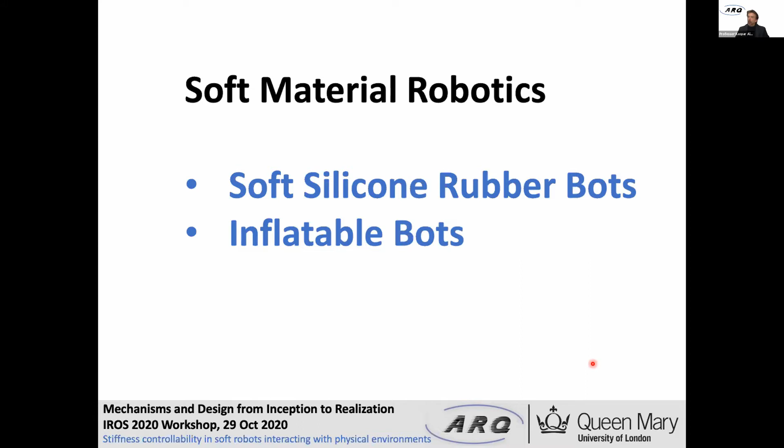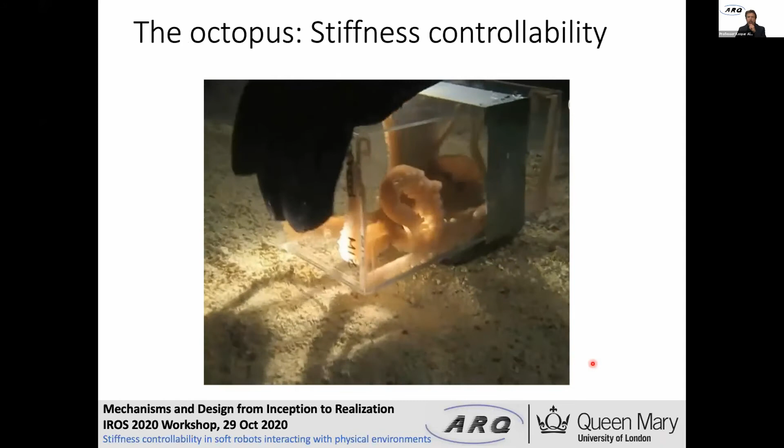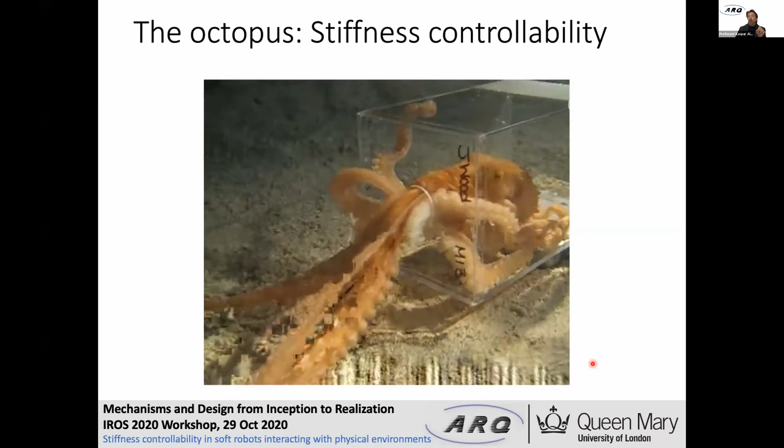In the spirit of this workshop, I don't want to go into too many details. I'm interested in soft material robotics, and I will focus on two parts of the work we're doing: soft silicone rubber bots, as I call them, and inflatable bots. We take inspiration from the Octopus, a fantastic animal with no bones in there. As you can see, very flexible, very compliant, very squeezable, capable of going through very narrow openings, but at the same time also able to apply forces to the environment by stiffening the muscles in their bodies and tentacles.

Looking first at those soft silicone rubber bots that we are working on, I have to go back a bit in time. The work started in the framework of an EU project, and the idea was to create these soft and stiffness controllable systems for minimally invasive surgery. And so from that, the work started.

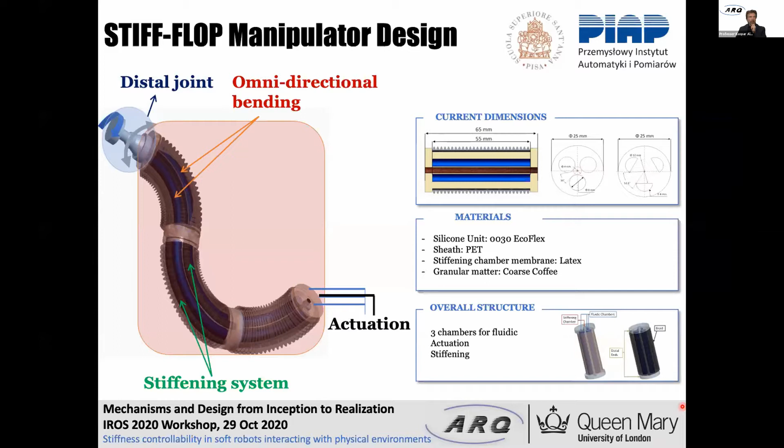It was nice also to see the work by Professor Suzumori, who gave us a lot of inspiration. We created devices very similar to what he has also been working on for many years. We started with systems that looked more like that, and we were not so happy because there was a lot of ballooning happening.

Here we had just silicone tubes, and that had chambers inside, and we filled them with air, so they were bending nicely, but that was not really what we wanted.

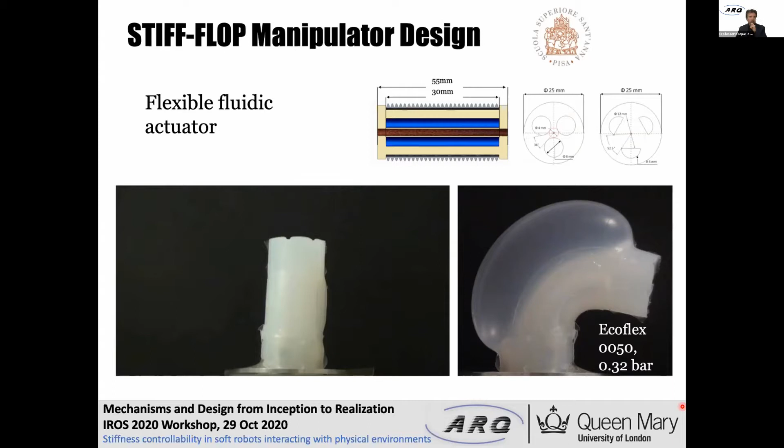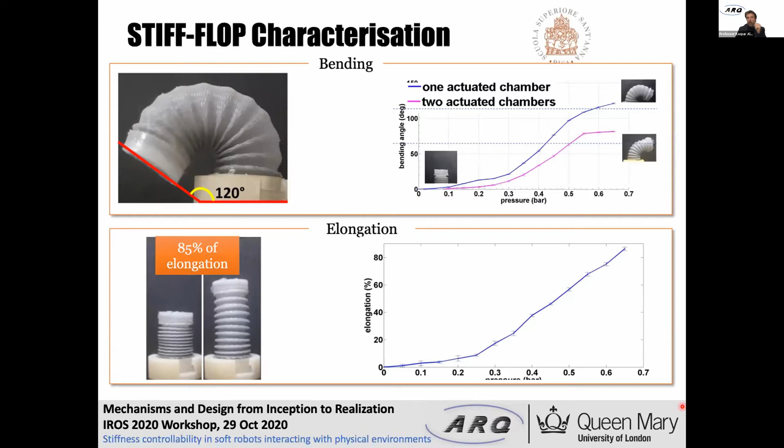So our first approach there to overcome the problem of ballooning was to actually put a mesh on the outside, as we can see here, and that kept everything at bay. And so we could bend our devices, we could elongate, we could apply forces to the outside. And as you all know, these devices are fairly robust towards kind of forces from the outside. So that worked quite well.

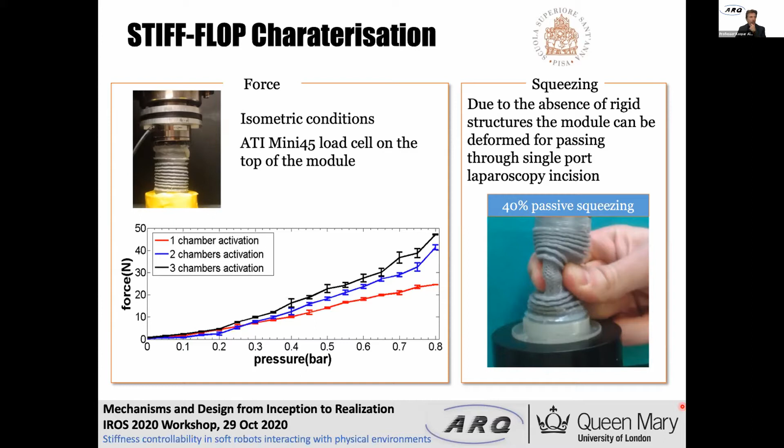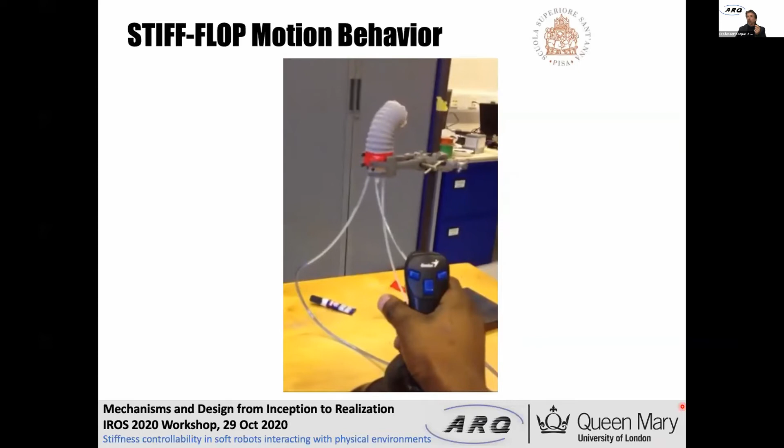We had our first prototypes, and I show here one example of one of our segments. So three air chambers inside, and then we are using a joystick to operate that.

But that was not really what we wanted. And even though we could avoid the overall ballooning, the ballooning was kind of happening inside. And when you have multiple chambers or multiple actuators inside one of these robot segments, then they influence each other. So that was really not good for the performance of these systems.

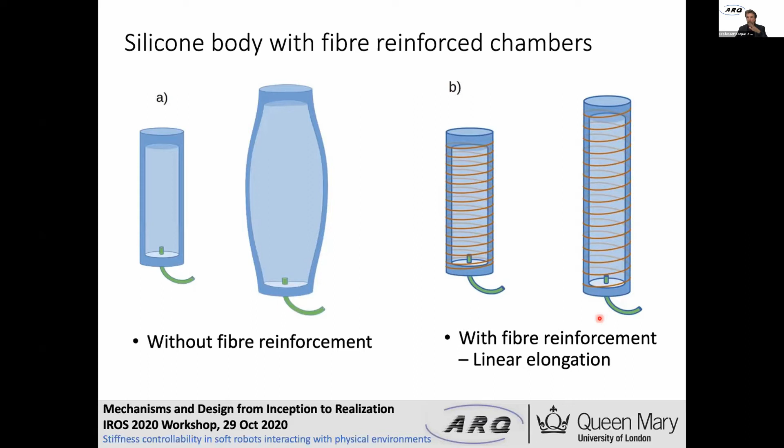So we decided then to look into fiber reinforcement and to apply that, a fiber on the outside of these chambers. And that really improved things quite a lot. As you can see here, this is the non-actuated state on the left-hand side. On the right-hand side, we push air inside and we get really a nice linear elongation.

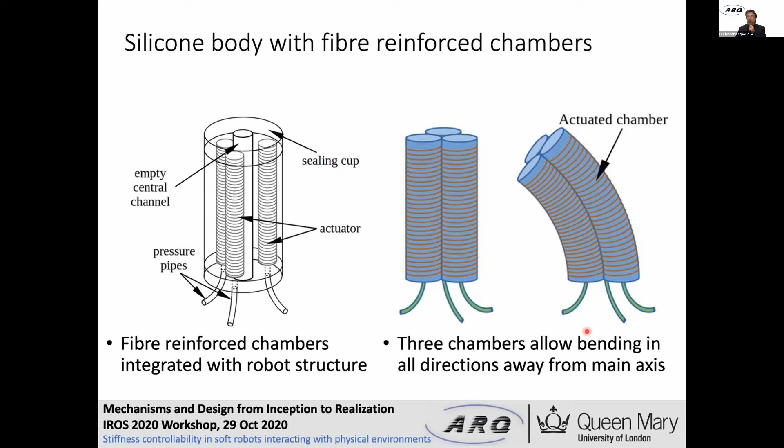And then we can put multiple of those actuators together. As you can see here, for example, on the right-hand side, you see now three of them together, bundled in a silicone rubber form. And when you actuate now one chamber, then you achieve that kind of bending. And that led to further development.

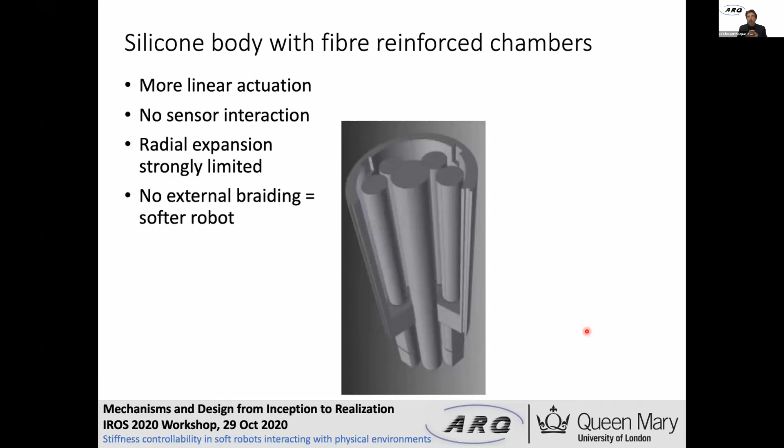So you can see here the CAD drawings for the molds we created. I should also highlight that we were really using molds here. It's quite a while ago, and 3D printing was of course available, but 3D printing flexible materials, soft materials, was not really an option then. And so we created these molds that were then filled with silicone material that could cure in those molds and be turned into these kind of structures.

So you see here in gray the silicone material. We have a central area, a hollow space to feed all kinds of things through. And these are now these fiber reinforced chambers. As we can see in this case, we work with pairs of chambers, and so we have three pairs all around. These chambers can be now actuated, and when they are pressurized, then they start elongating. And because everything is kept together in this soft structure, we achieve bending in one direction.

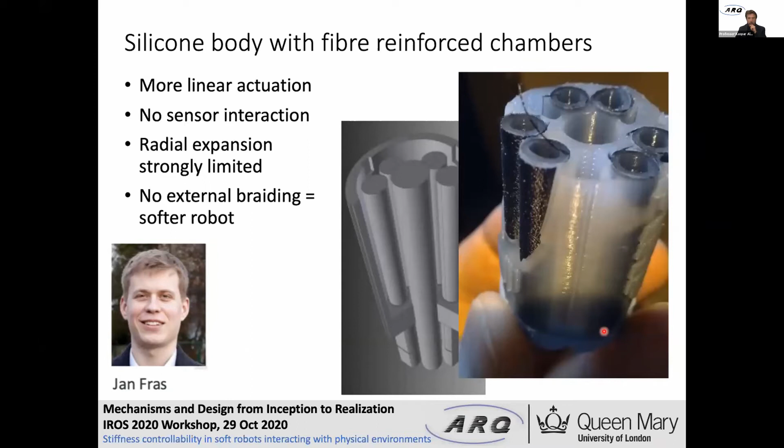I have to mention in this context my PhD student Jan Fras, who has been really involved quite a lot, and I will mention him quite a few more times in the coming presentations. Now, what you might say is, okay, that is nothing new really.

Others have used fiber reinforcement for their pneumatic chambers. So the point I want to really highlight is the fabrication process we are using. We roll up, wind up the fiber before we start any messy work with silicone material. Many others first create a silicone structure and then apply the fiber to that, which makes things more complicated because it's more difficult to apply the fiber.

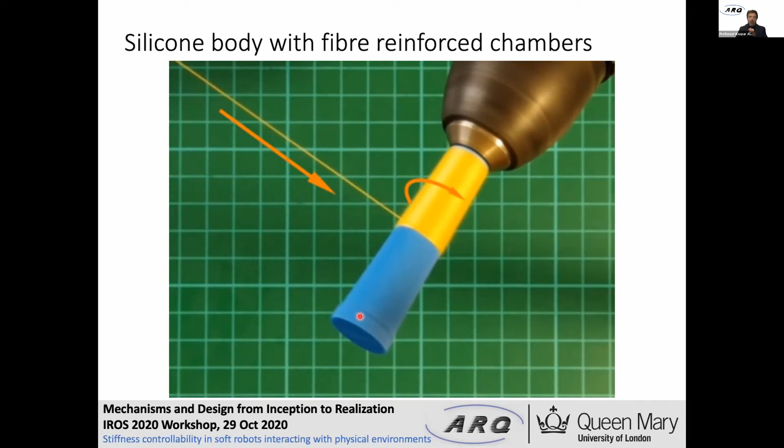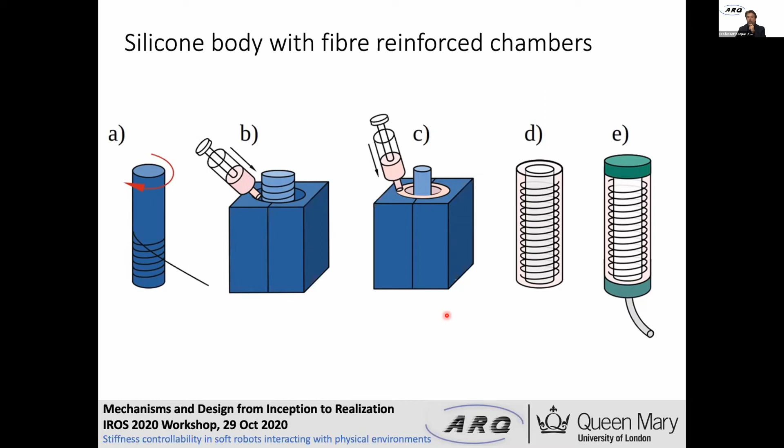That is then stuck inside this first mold, which is filled with silicone. After it is cured, it's taken out, the mold is removed, and you create an empty space in the center that you fill with silicone. So you apply the silicone from the outside, then once the fiber is in place, you apply silicone from the outside and then from the inside. That makes the process much more rapid and accurate, because now we have a very well applied helical fiber structure sitting in the wall of our inflatable chamber.

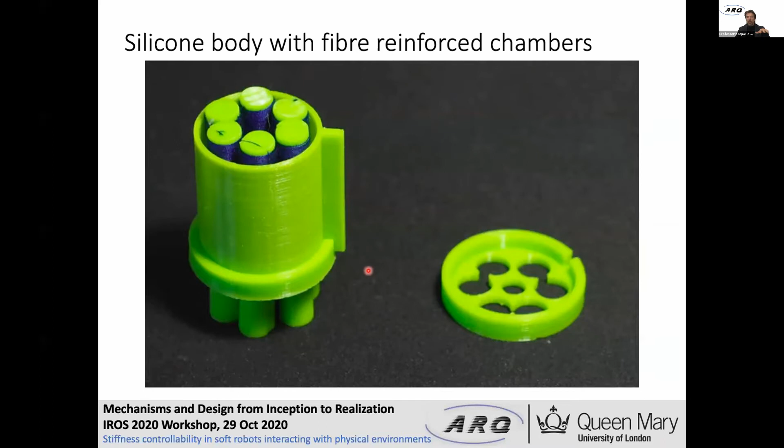And Jan Fras, I have to mention again. Here you can see how these things are put together. We have the outer mold, and inside we have the multiple actuator chambers with their fibers on them, and that is filled with silicone material, with a lid put on top.

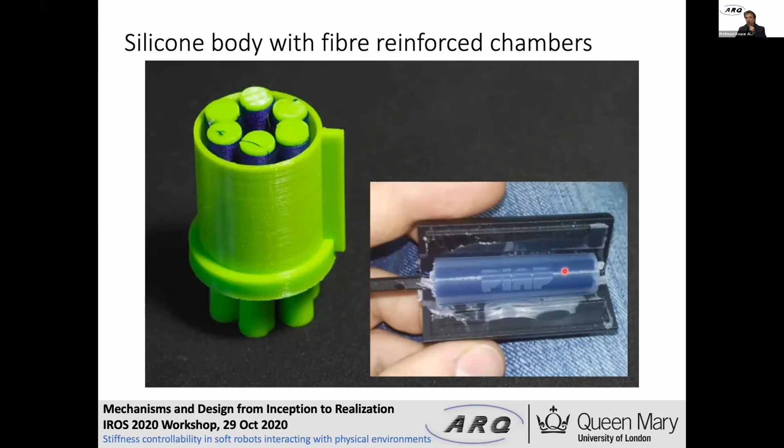Here's another view where we can see how the silicone is formed around the inside chambers. You see here in a slightly darker blue these chambers sitting inside our structure. That allows us to make nice robots like these.

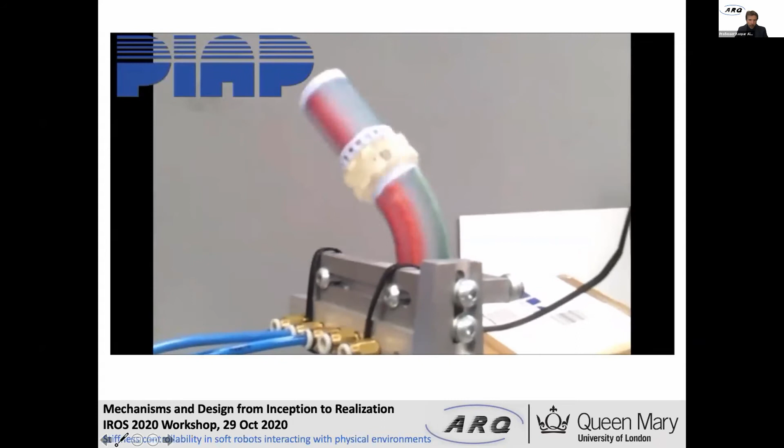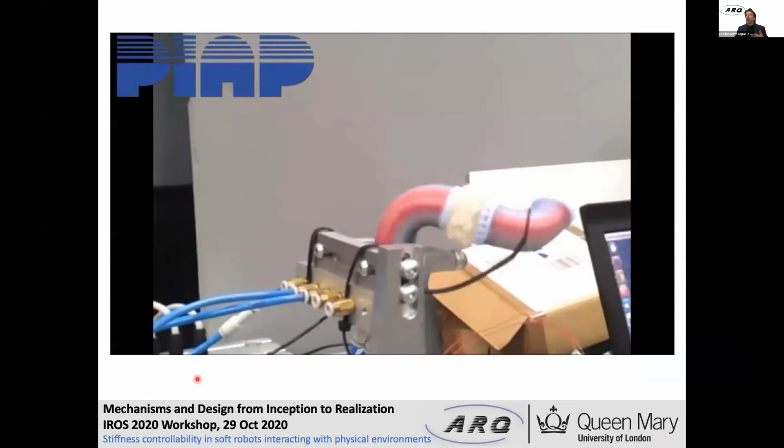Can you hear the sound from the video? You can hear it. I don't want to, I mean, it's not there for you to hear it, but never mind. It shows that we use, of course, a compressor, a problem that was highlighted beforehand.

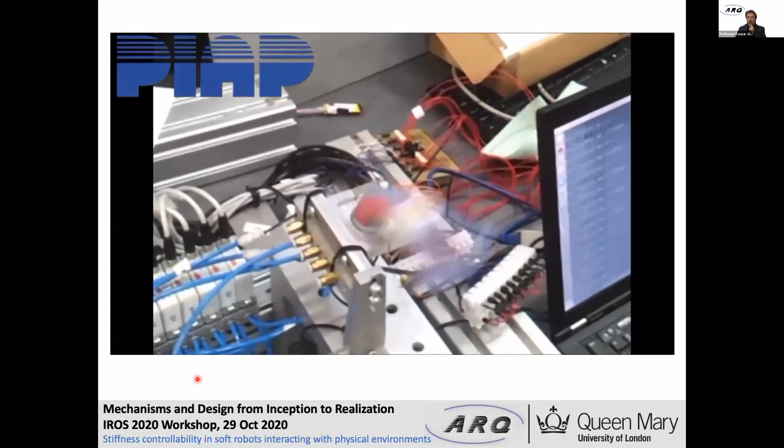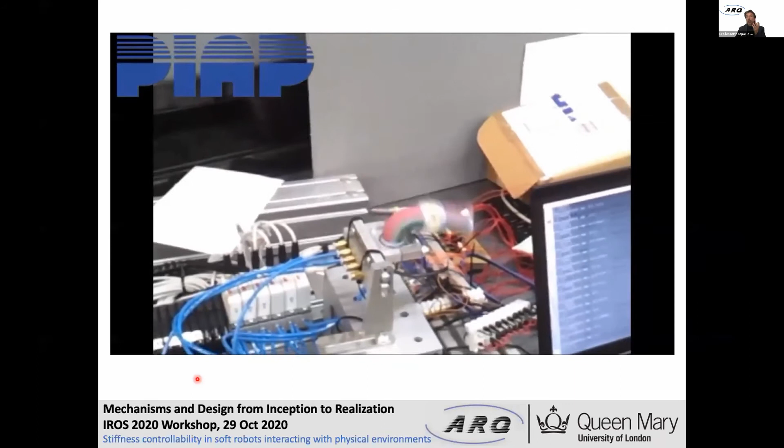You see the blue chambers there, blue tubes that feed the air into these robotic devices, which actually work quite well, as we can see here, very robust, very nicely controllable. We are using a PlayStation controller to control them.

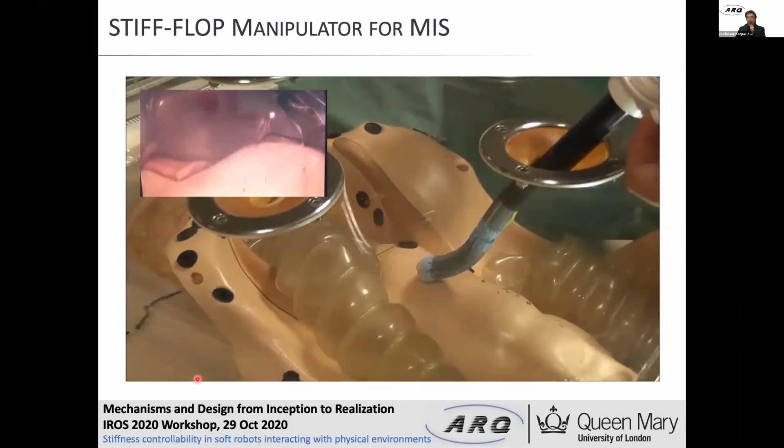That can be further developed towards the creation of robotic devices that can be used for keyhole surgery. Here we are inserting one of our robots, made up of two of those segments, inside a replica of a human body, so it's a phantom. It has a camera at the tip that gives the images we can see on the top left. We can now move inside and use the actuation and dexterity to move forward and move around obstacles that are possibly in the way.

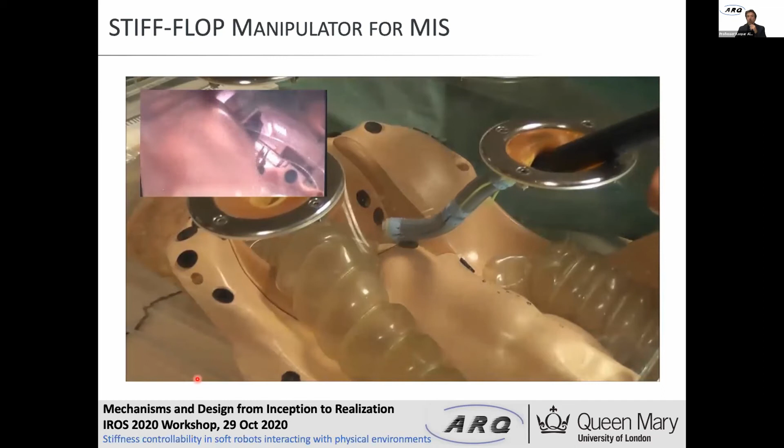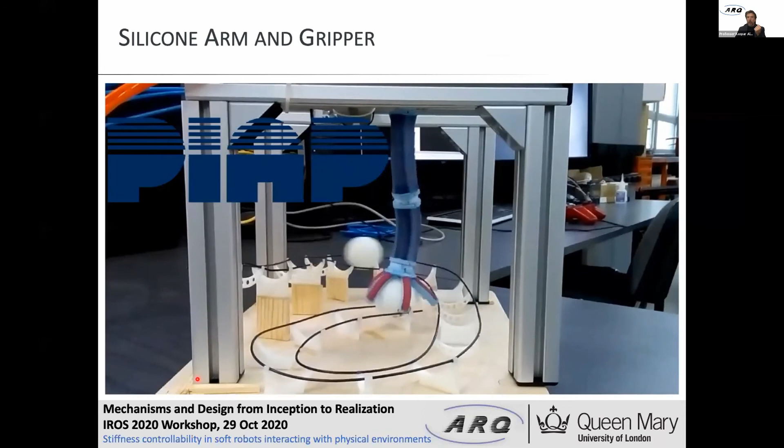The same principle has been applied here as well. You can see the same kind of approach taken to create a robot arm that could possibly be used in manufacturing. We have 2 segments in the main body, the top segment and the lower segment, each with 3 pairs of chambers that can be actuated to achieve that movement.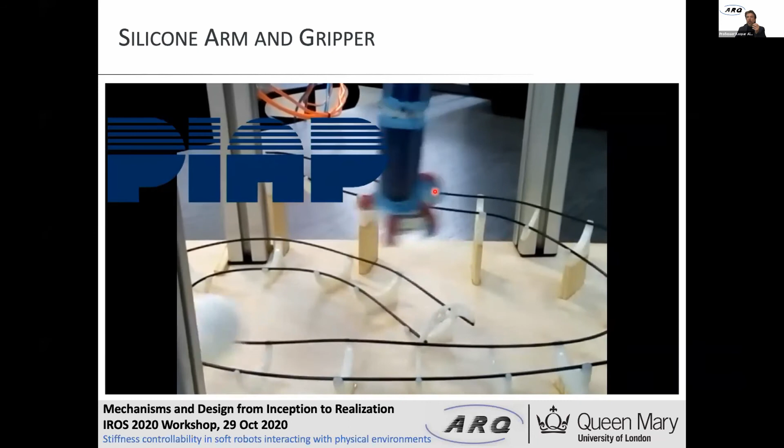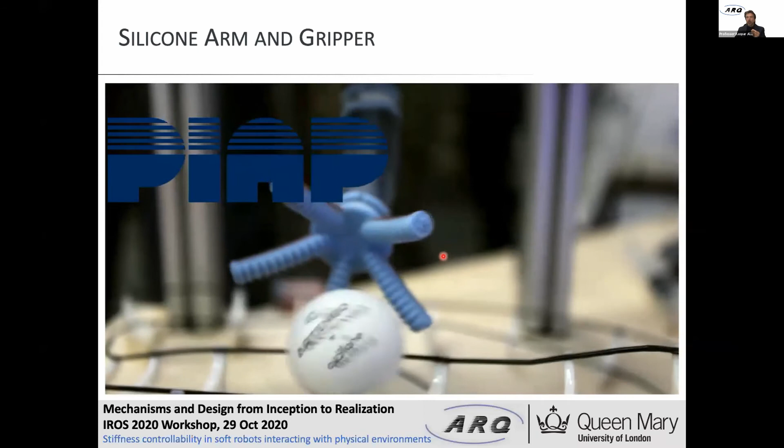The same principle is applied again in the robotic fingers. Again, we have these chambers built in. These are fiber reinforced and allow us to carry out very robustly these kind of grasping movements.

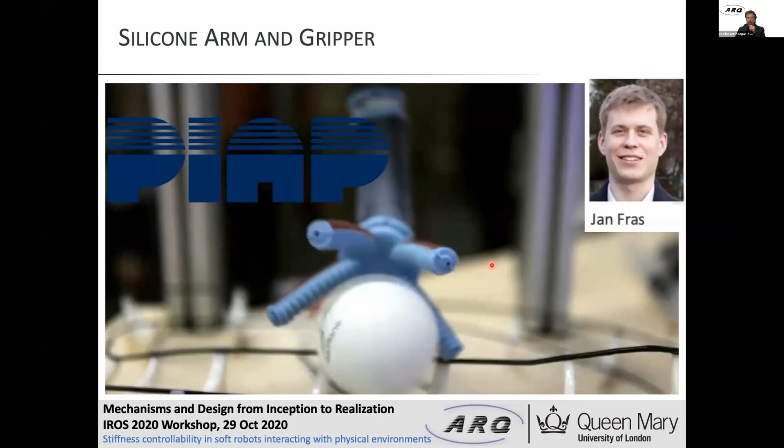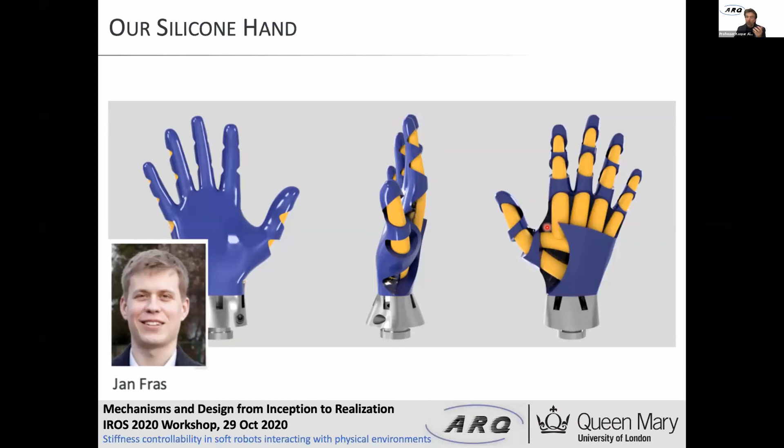I mentioned Jan Fras a few times - he is also in charge of these hands that we have developed. Again, the same approach is taken. We have in blue a stiffer silicone material, integrated with these chambers. In yellow, again the same kind of chambers, with fiber reinforcement, this time to make them elongate in a linear fashion.

We can see that here in action. So we have our robot hand here, and it is now controlled by a leap motion input device, and gives quite natural movement, I think.

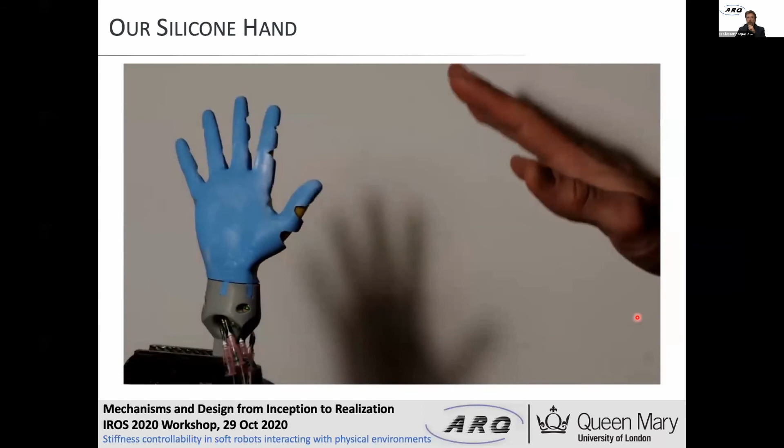A few more examples. Here we have moved forward and created a kind of tentacle, based on the same principle again. The only difference is we have split the chamber into two parts.

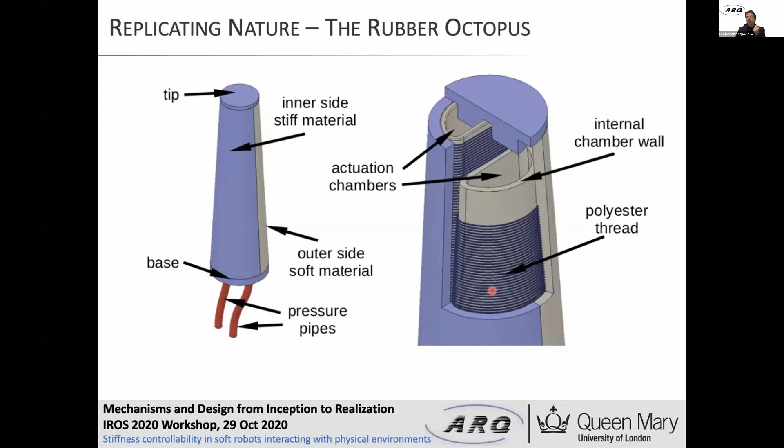So you have one part here and another part there, and you can see again the fiber reinforcement. This allows us to create dual chambers combined together, giving us much more control over the arm it's attached to, which we can see here in action.

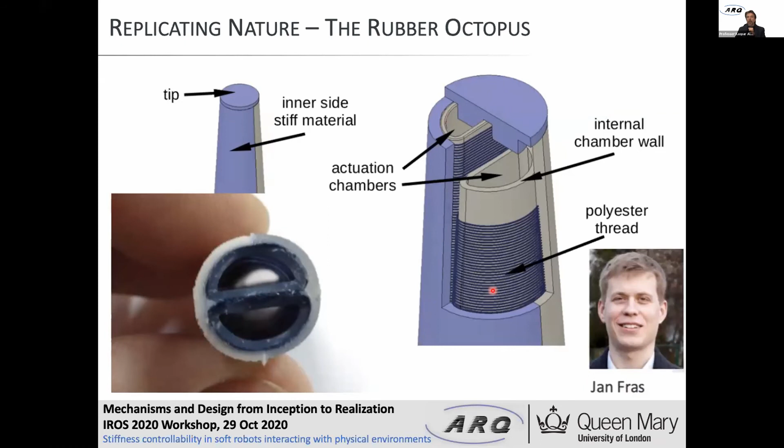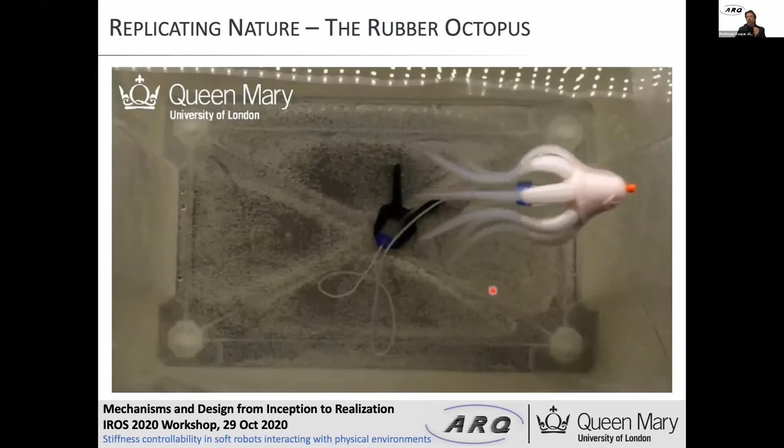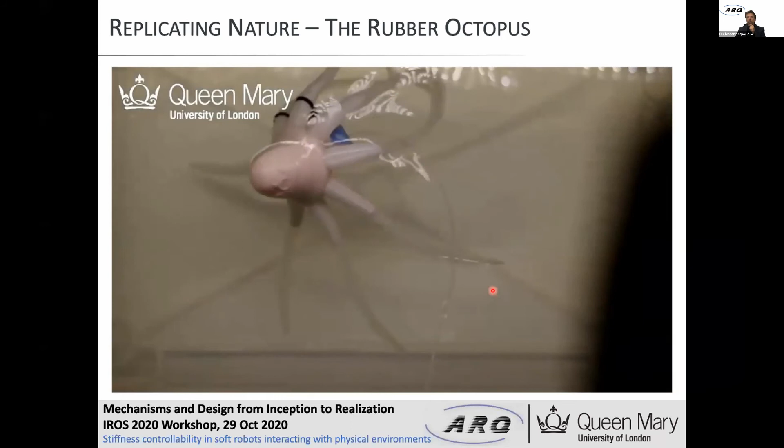We can achieve different movements depending on how we control the air going into these chambers, and also control the way we actuate the various chambers, 8 of them in this octopus phantom. We can also control the stiffness in these chambers.

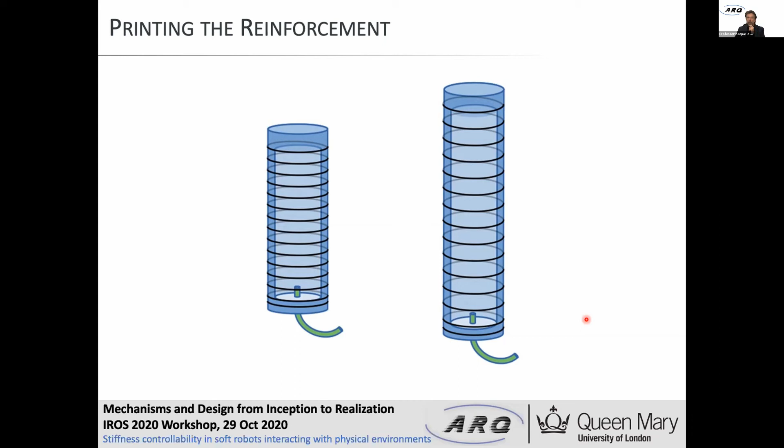Coming back to this diagram, we're trying something new now. Instead of winding the fiber onto a rod, we are trying to print the reinforcement, so it becomes part of the production process to make production even simpler. Jan Fras has also worked on that. I have to accelerate a bit, I feel.

We can see here plastic fibers being printed, for example from PLA or from nylon. Nylon gives better results because it is more flexible. And these actually remain in there.

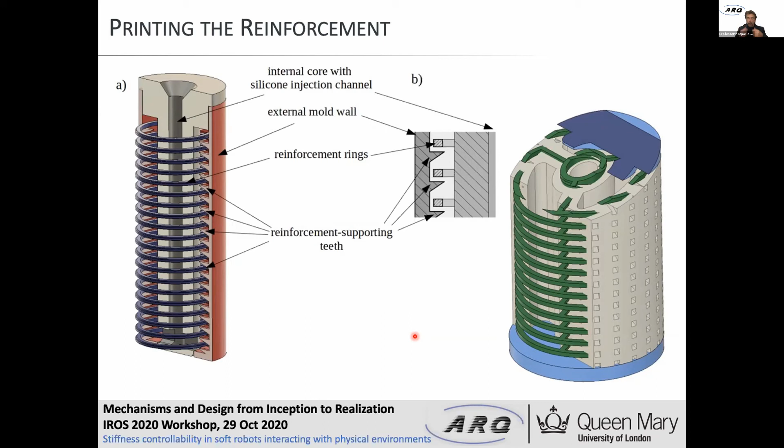The trick here is to have a scaffolding on the outside. You can see it with those hooks sticking out, holding the rings in place during the production process. The structure is printed, silicone is poured in, and then you destroy the outer scaffolding, and what remains is...

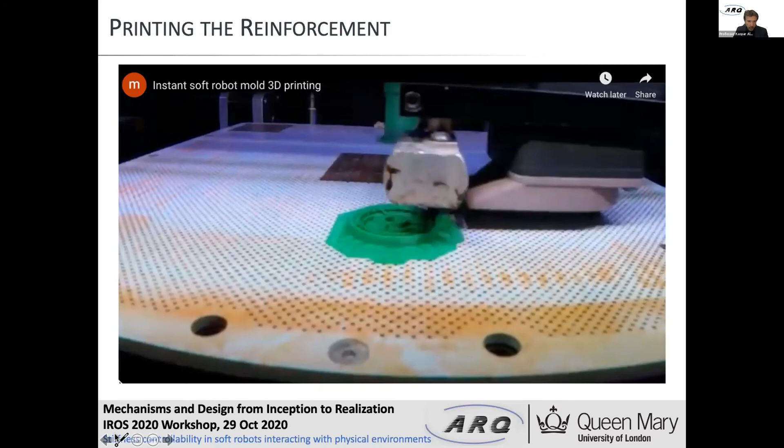The video doesn't run, just give me a second. Now I should be able to run it.

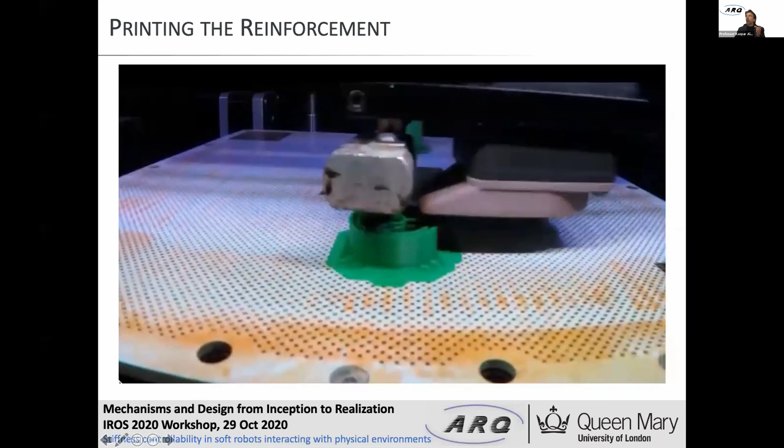Here you can see the printing process, and that is all that is needed. You just print this structure, pour the silicone in, and the only additional step is to put caps on either side. Anyone who has the CAD drawings can create pneumatically actuatable soft robots.

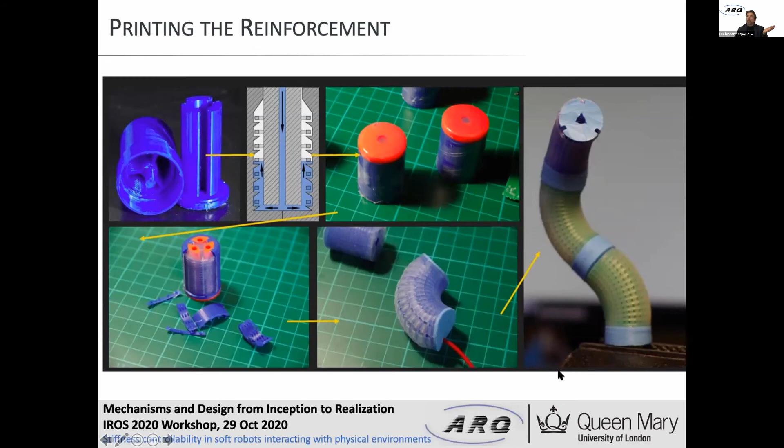You don't get it totally for free, though. We compared this to our fiber reinforced systems, and as you can see, that bends very nicely even at high pressures, while if we increase the pressure too much in our new system with printed reinforcement, there can be a ballooning effect.

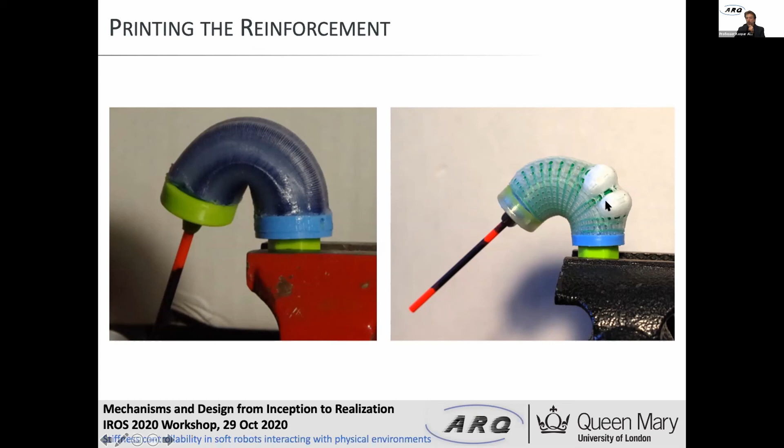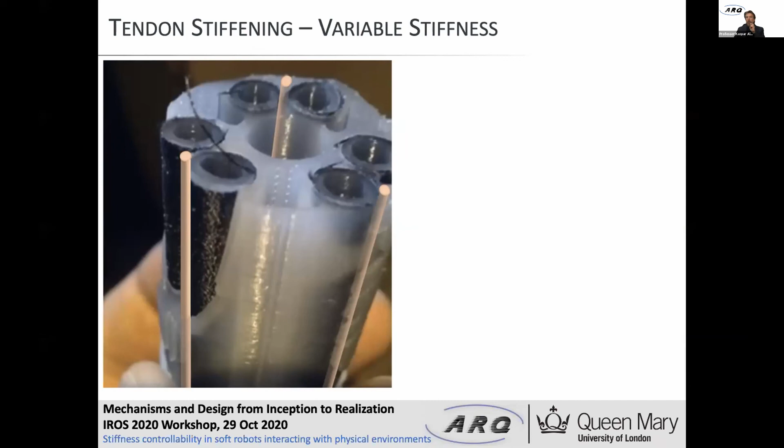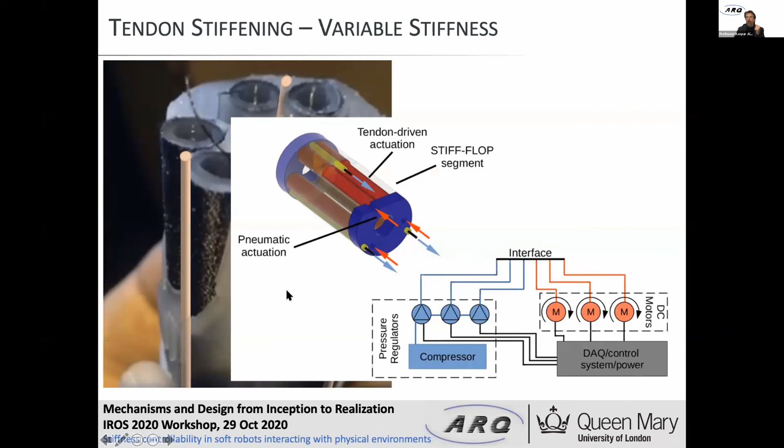I have only a few more minutes left, so I'll show quickly that we also worked on stiffening these devices by introducing tendons integrated with what I've shown beforehand. We have our soft robot actuators with fiber reinforced chambers, tendons integrated that can be motor controlled, and we can now pull against the air going into the chambers to create stiffening.

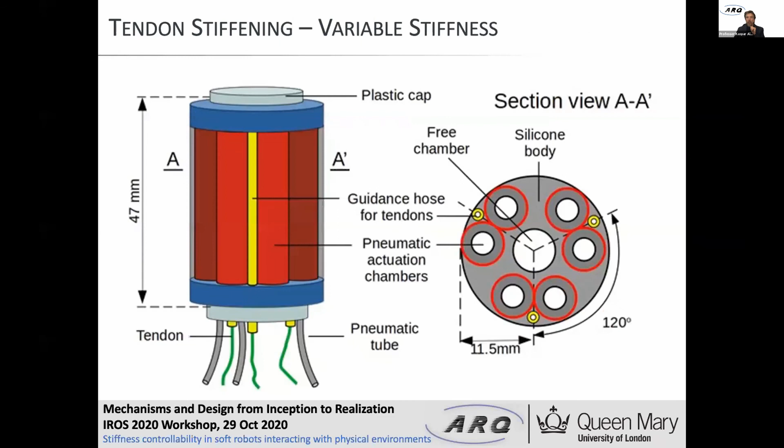That was done by Ali Shiva, so credit to someone else. We showed through experiments that the stiffening can indeed be increased in this way. I have only 1 minute left, it seems.

We have also developed fabric-based robotic arms that are inflated by air. The interesting thing here is they are inherently antagonistic: we push air in and use tendons to pull back.

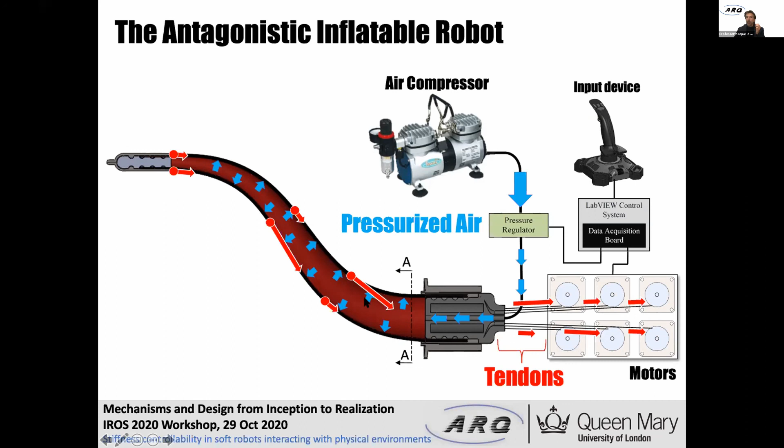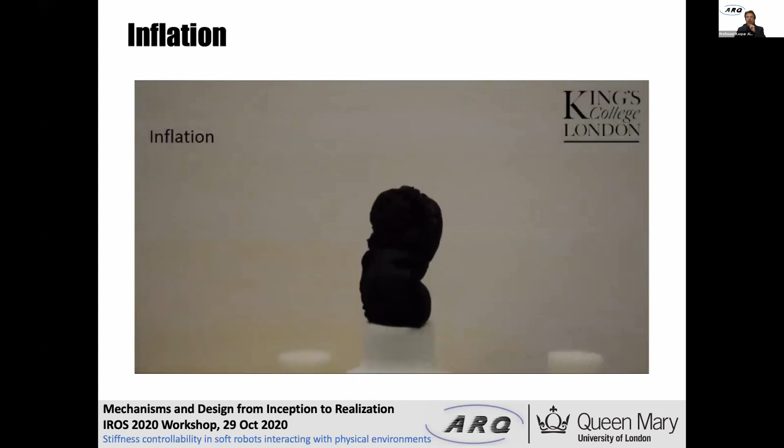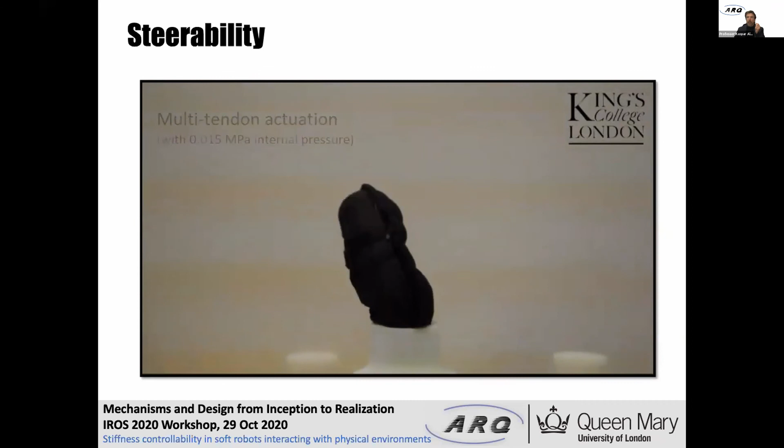This antagonistic behavior allows us to navigate them, and we can see how they inflate and deflate. Once we are in the space, we use tendons to steer them, allowing us to navigate and change stiffness at the same time through air pressure and tendons operating in the other direction. We have turned this into inflatable robots and inflatable endoscopes, as shown here.

I can stop at this point, or maybe give one more minute to another system we have been developing.

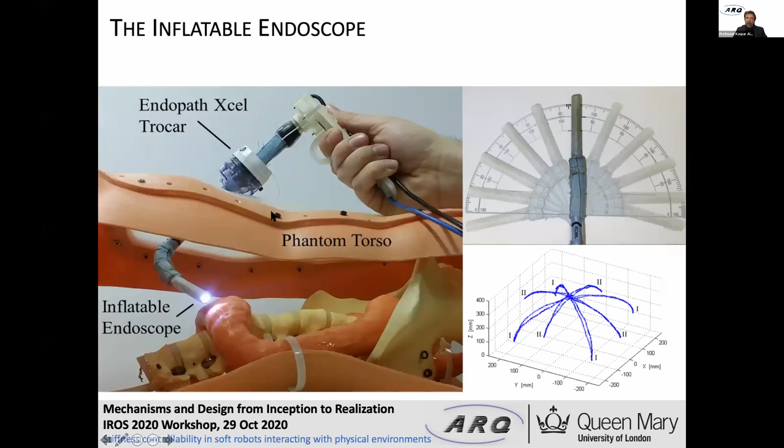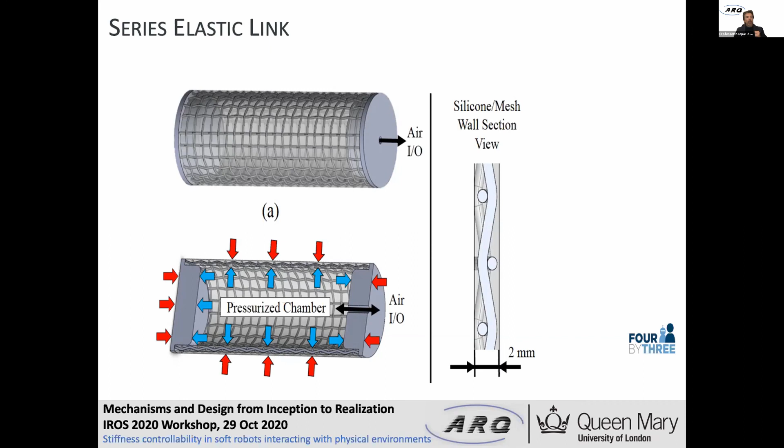No one is complaining, so I'll quickly jump to the inflatable, stiffness-controllable systems we're also developing. Here we create links made from a silicone material and a mesh wall, and use that to integrate with robot arms that have a very standard structure but can now control the stiffness.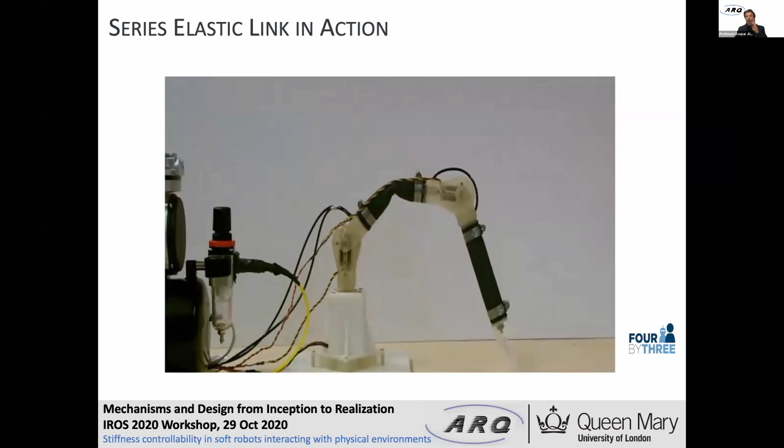So we create something that is very safe, because if need be, we can reduce the stiffness and make it safe for human-robot interaction. That is our response to the series elastic link, SEA.

I think I should stop now. So thank you very much.